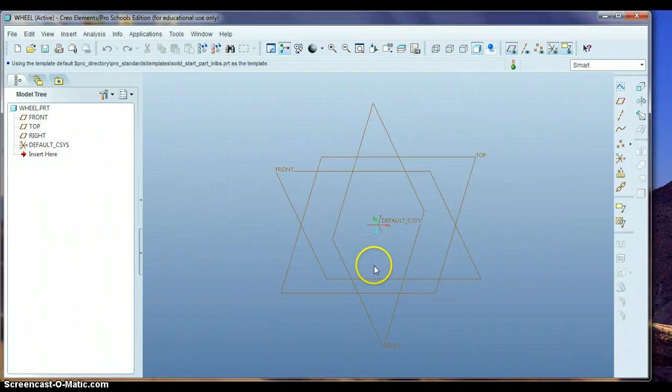Alright, so we're going to do take two on the wheel. We'll go File and New and create a new part. You can call it Wheel. I'm going to hit Cancel because I already have a new part up here already. So, create this wheel. We're going to go to Front and click on Sketch.

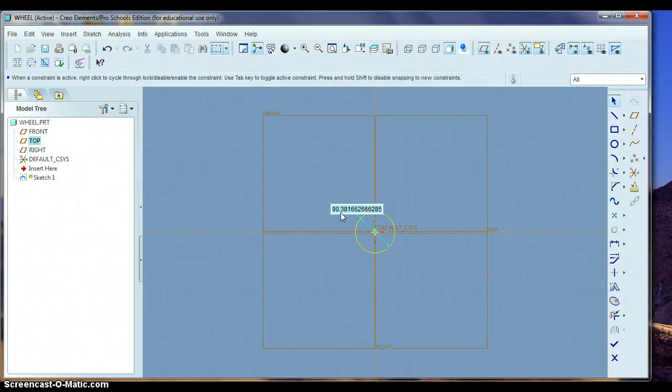And we'll hit the Sketch button here. Now we're going to draw a circle, and click on that blue arrow there. This wheel is 1.5 inches in diameter, so that's 1.5 the diameter. Again, you can hit the refit button to kind of zoom in, and then we'll hit the blue check mark for done.

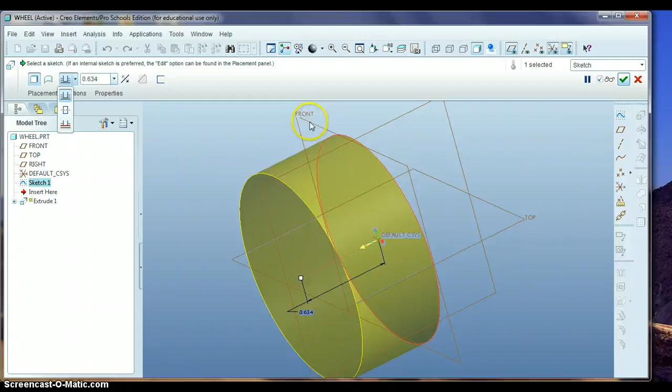And now we're going to extrude this. I'm going to hit this pull down menu over here to extrude on both sides of this datum plane, because right now it's just extruding on the one side here. So I'm going to extrude on both sides like that. And the thickness of this wheel is 3/4 of an inch. We'll change this to 0.75 and press enter, and then we'll hit the green check mark for done.

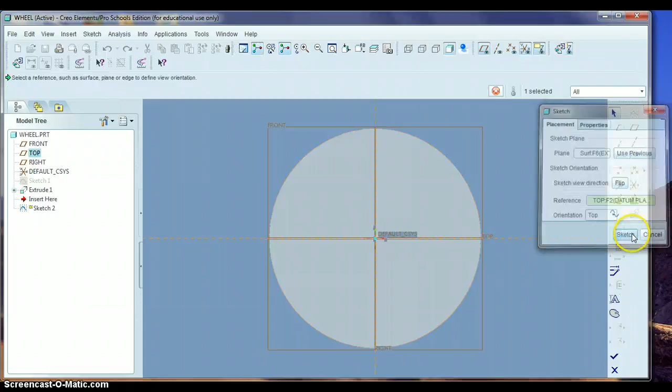So there's the basic shape of our wheel. Now we need to cut it down just a little bit. We'll click on the face of this circle, the wheel, and we'll hit the sketch button, and we'll hit sketch again. And now we'll click on the circle, starting in the middle. Because this wheel is cut out just a little bit in the middle of it, we'll draw a circle like that, and we'll click on the blue arrow.

And the diameter of this inside cutout part is 7/8. The thing about Creo is we can type in fractions and it'll change it to decimals for us. But we'll go 7/8 for 7/8 and press enter. And you can see it changes it to 0.875, which is 7/8 in decimal form. And so there's that, and we'll have to hit the blue check mark.

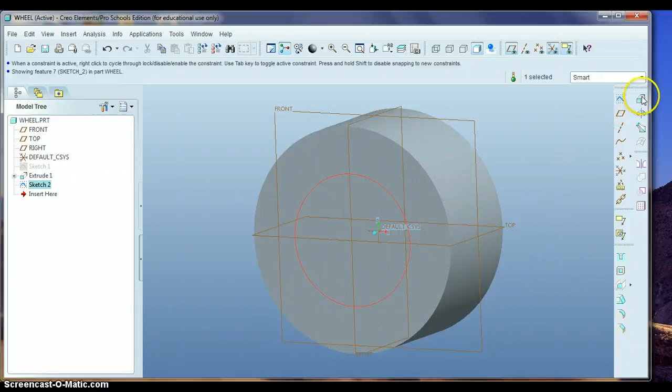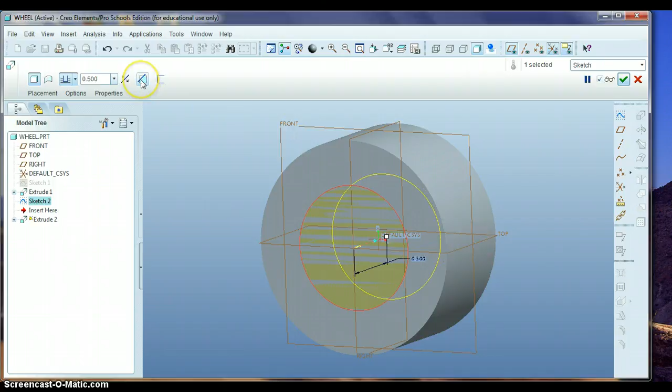I'm going to rotate this just a little bit so it's a little easier to see, and we'll hit the extrude tool. We're going to flip this direction. Now comes a little bit of a guessing game on how deep to take this. We're going to go with about 1/2 inch, which is pretty close here. We'll type in 0.5 and press enter. And we're also going to hit the remove material button, and we'll hit the green check mark.

And so there's starting to be cut out of this the wheel a little bit. We need to do sort of the same thing on the back side here, to cut out some of this, and let's go. Oh, let's see. We're going to simplify it just a little bit.

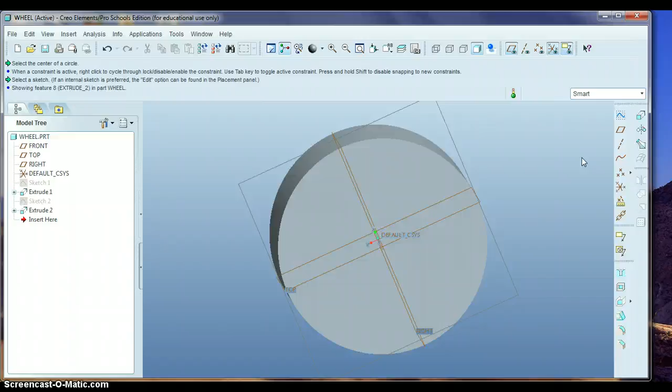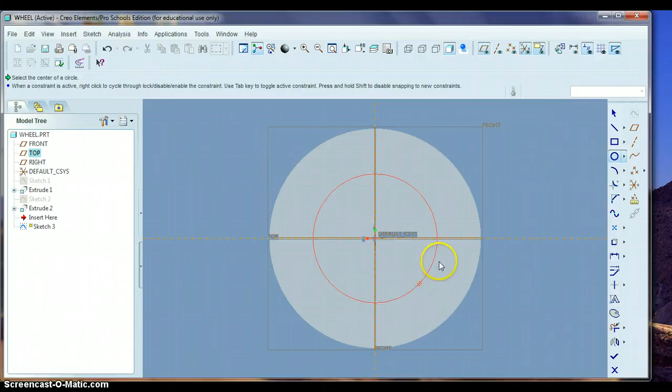And we're going to click on the back face here. We'll hit sketch, so click on that surface there. Make sure the sketch plane says surf for surface. We'll hit sketch, and we're going to draw 2 circles. One starting in the middle here, coming out towards the outside. We'll change that to 1 and enter. And then we're going to draw another circle here.

And this outside circle diameter on the blue arrow is 1 3/16, or 1.188. That's not right, I'm sorry, let me remeasure that real quick. How about 1 and 7/16? Sorry, 1.438 is what it should be. And press enter. That's better.

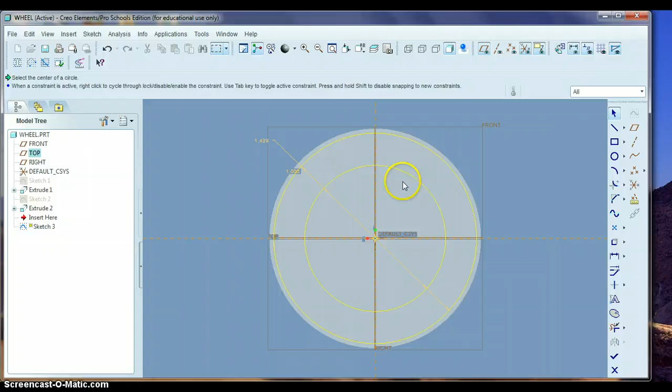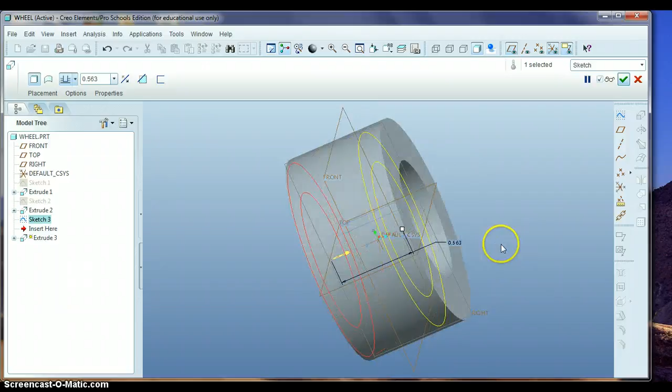And now we'll hit the blue check mark, and we're going to extrude. We're going to flip the direction, and we don't want this to go all the way to the end, or to the inside here, so maybe 3/4 of an inch, or 0.75 here. Yeah, let's change that to 0.625, how about that? That'll give us a little bit more material. Then we'll hit the remove material button and hit the green check mark.

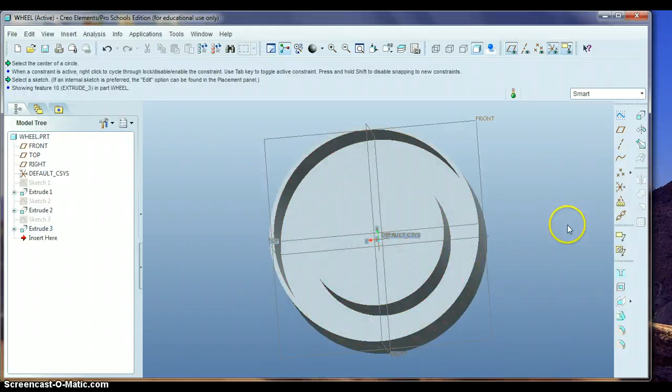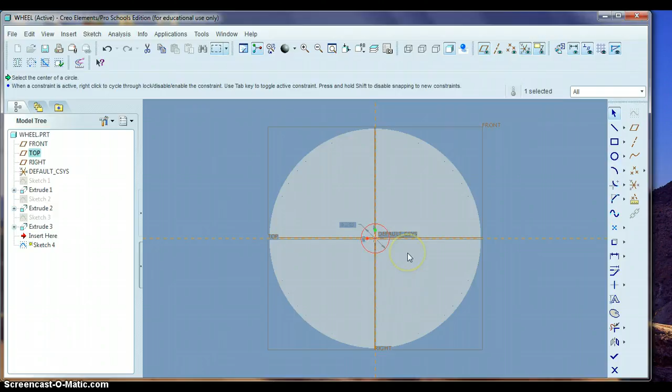So now there's the inside cutout that we'll have, and then we need to draw the little part where the axle goes in, and that's just a series of circles here. So we're going to click sketch, click on this face, and we'll hit sketch, and we'll draw a circle. And the outside diameter is going to be 2 circles that we're going to draw here.

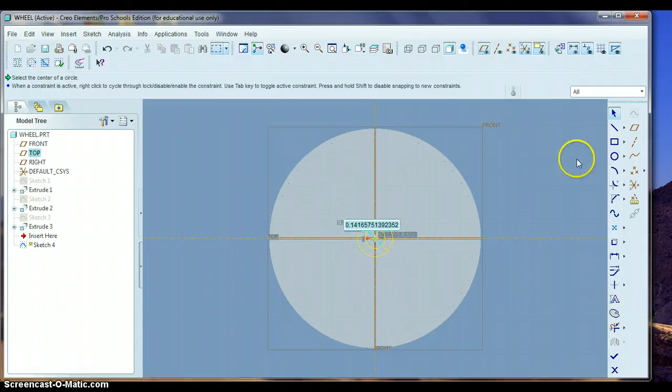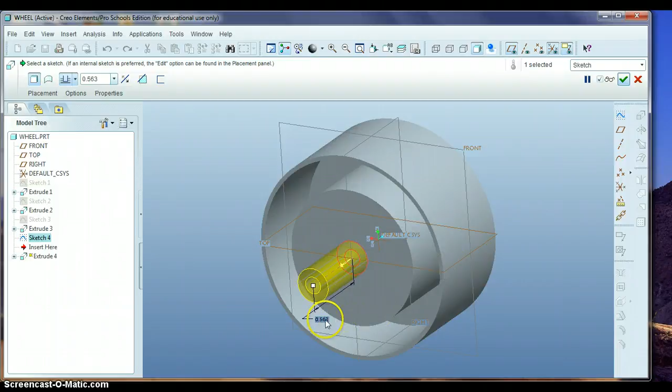The outside diameter is going to be 0.25, and then here is going to be, this inside one is going to be 0.125. Press enter, and then we're going to hit the blue check mark, and we're going to hit extrude, and we need to extrude this out 0.25, or 1/4 of an inch, so 0.25, and we'll hit the green check mark, and there's one.

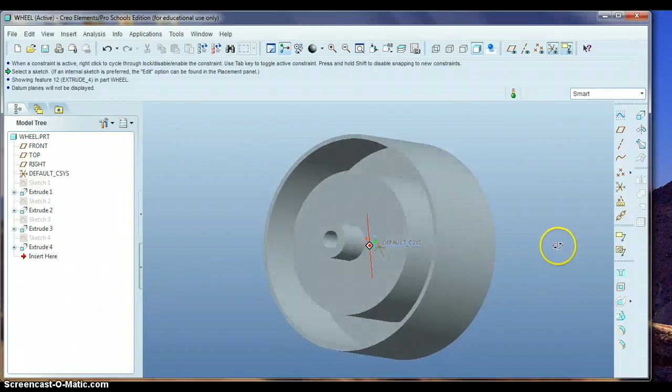We'll turn the datum planes off just so we can see it a little bit better. So that's our wheel. It's a little more basic than what the actual wheel might call for, but I think it will work for us as we draw this up, model it, our catapult and everything.

So next thing we're going to do is we're going to create the axle that will attach into this wheel.